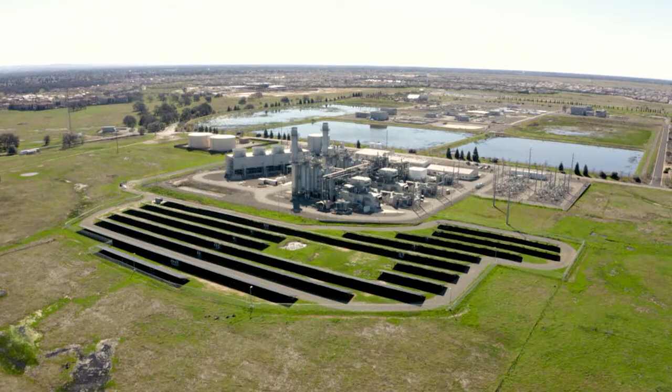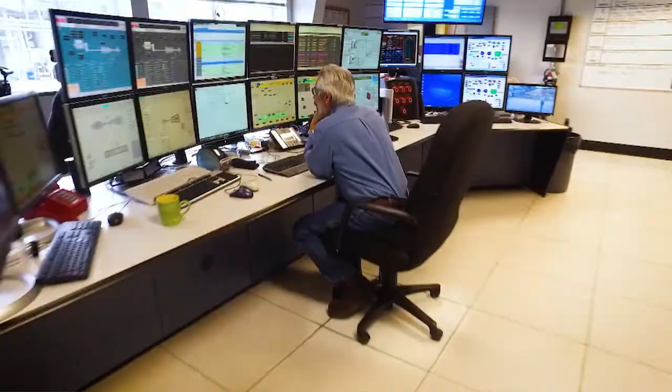Welcome. Good evening. On behalf of the commissioners and staff, I would like to welcome you to the November 22nd, 2022 City of Roseville Public Utilities Commission meeting. This 7-member commission is responsible for studying and advising the City Council regarding all utilities owned or operated by the city, including electric, water, wastewater, and waste services.

The Public Utilities Commission advises the City Council regarding planning, rates, public information, cable television franchises, and other matters relating to such enterprises, and may also hear citizen complaints as to operational rates. The Public Utilities Commission also advises the City Council regarding the activities of such joint powers agency as the city may be a member of, or which relate to such utility enterprises.

At this time, I would like to ask that everyone put their electronic devices on silent. Pam, could you please call the roll? Sure. Commissioner Bilski? Here. Commissioner DeLacy? Here. Commissioner DeMarkey? Here. Commissioner Granger? Here. Commissioner Maish? Here. Commissioner Webb? Here. And Chair Knox, I believe, is absent. Okay. Would you lead us in the Pledge of Allegiance?

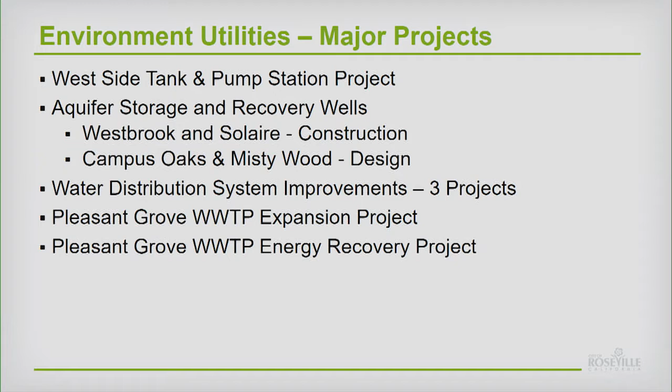We did an expedited construction schedule to get the tanks and the pump station operational so that if we needed it to mitigate supplies during the summer, we would have it. Right now, we're wrapping up the final punch list of the project, and we're going to close it out completely by the end of the month.

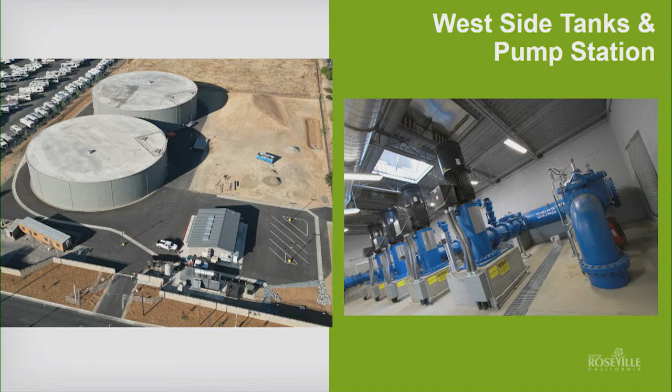This is an overview of what the two 6 million gallon tanks look like now. It's quite different from the bare field, I think, when we last presented to you. The pump station in the bottom right has 4 inline vertical turbine pumps with space for a 5th one in the future. The site also has a spot for a future third 6 million gallon tank if we need that for capacity. And then total project, just good news on this project.

We completed the project for under our estimated $28 million budget. Cool. So we were on budget and on time with this project.

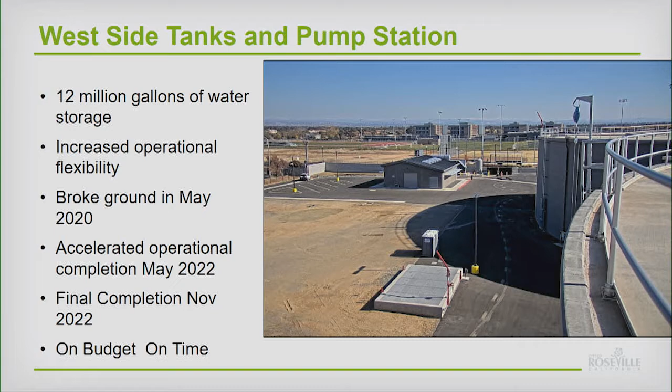One last little thing on the next slide that I wanted to share with you that's going on out at that same site. We are about to break ground on a crew building that will go on that site. It's about a 6,000 square foot building. Roughly half of it is a crew building where our water operations folks can do trainings. There'll be some office space, a conference room. And then the other half of the building is a shop where we can do maintenance and repairs.

There is also an area where our water distribution folks can store materials, pipe, valves, bedding materials, so that when they're working out on the west side of town, they don't have to come all the way back to the corp yard. This project's cost estimate is about $3.3 million. We are ready to break ground any day and hope to do that next week, actually. And a schedule for completion in July of '23.

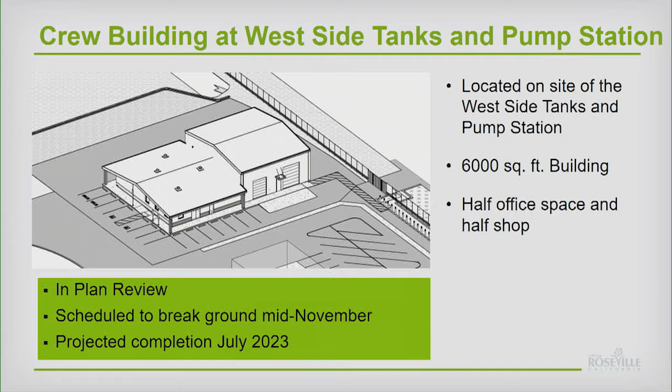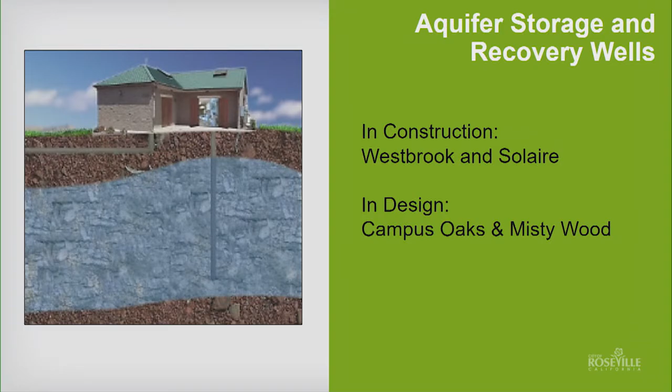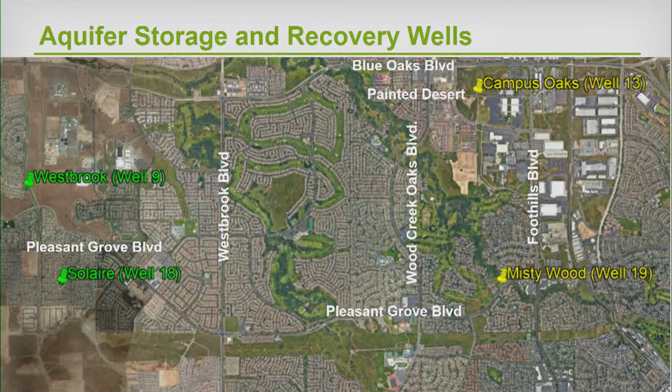At wells 9 and 18, construction is moving right along. We have had some significant delays in the completion of this project, mostly due to electrical components and supply chain issues for those electrical components. So right now, the sites are paved, the well pumps are going down the hole, and the column pipe is going down the hole.

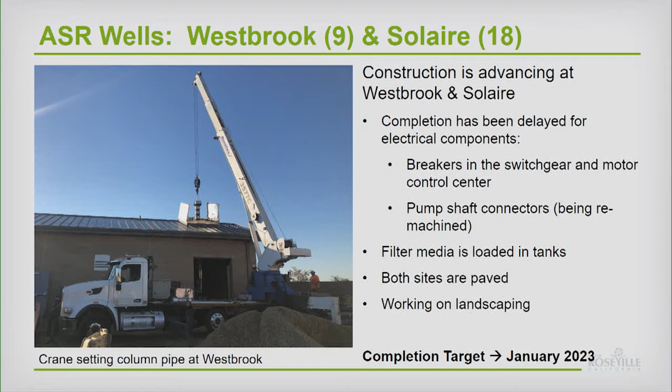What's different about these 2 sites from any of our other ASR wells is they have water filtration on site. We use green sand and activated carbon for the treatment of manganese and iron. There are no contaminants of concern, but they are taste and odor issues that we want to make sure we address before we put the water into our distribution system. The target date, breakers arriving on time, is still in January of 2023.

This is just a quick picture to show you how tight these well sites are. On the left, these are both at Westbrook, is just our scaffolding when we were building the actual building. And on the right, this is actually what the 6-bowl downhole pump looks like as they're starting to set it down the hole.

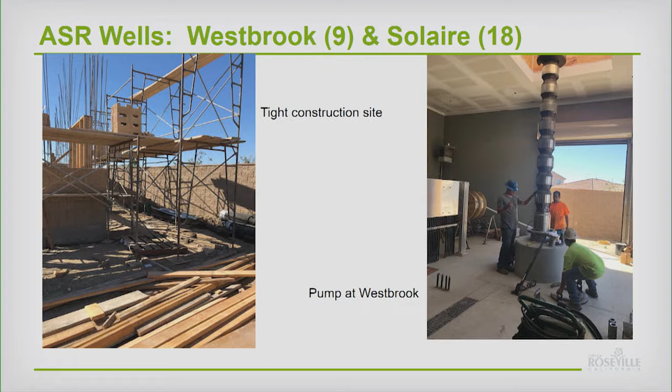At Misty Wood and Campus Oaks, we've done an initial layout of how the facilities will fit on the site. We had to do that. We're going to do this project in kind of phases. We do our initial layout, decide where we want the wells, put out a request for bids for drilling of the wells, and that's about ready to go out. Should be coming to your city council meeting here shortly.

We drill the wells, then there's a couple of months that we take to test the water, pump the capacity of the wells, and finish our final design of the above-ground facilities. We anticipate that the wells will be drilled in the spring. We'll have that summer period of '23 to do our sampling and analysis, finish the final design, and put the construction contract out for spring of 2024.

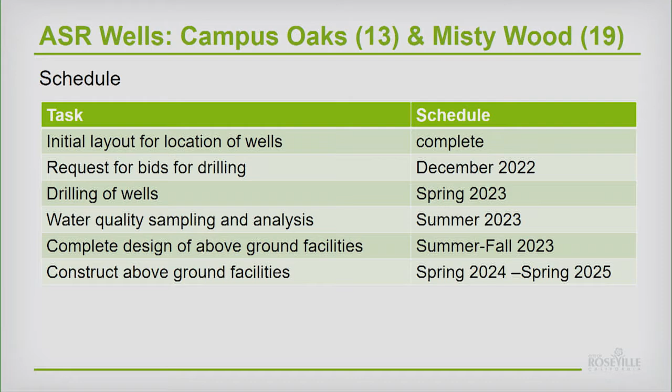This is where the Misty Wood well site is going to be. That's on Pleasant Grove. As you know, or may not know, we are planning on widening Pleasant Grove in that area to a 6-lane road. So this initial design is what we're kind of settled on right now.

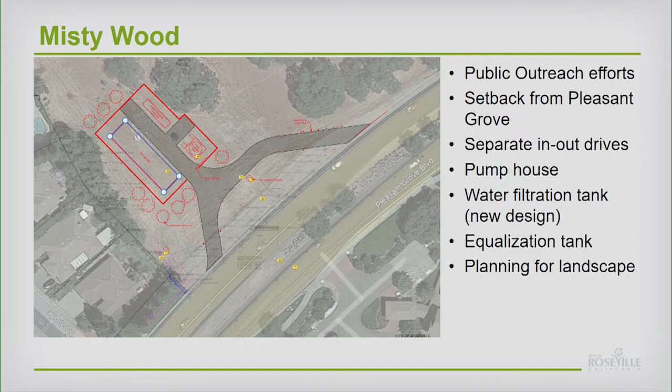It has a separate entrance and exit from the facility so that workers can get safely in and out of the site. It also gave us the opportunity to push it back from the street. We've been working with landscapers and doing public outreach early so that we make sure that we have residents' buy-in and can maintain their nice scenery from those few houses right there.

The next slide shows the Campus Oaks, which is actually, I don't know if you guys know where Painted Desert is. This site is west of Roseville Parkway and south of Blue Oaks. There's just some development out there right now.

We have been working with the developer who is at the moment getting ready to put his utilities in Painted Desert Drive. He's been very cooperative and helpful with us so that when they stub up the utilities, the water, the sewer, the electric onto this site, they're in line where we already need them and we won't have to do any changes when we get ready to build.

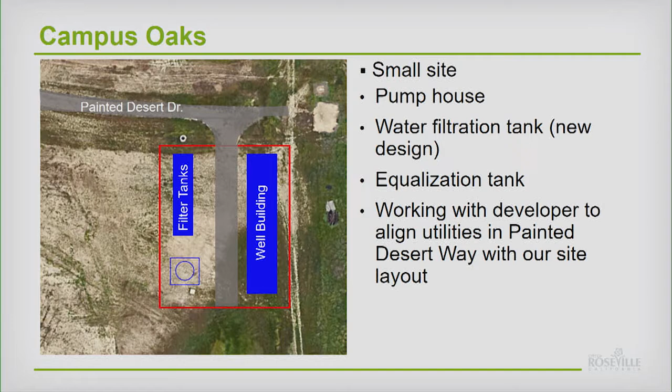The last project I'd like to tell you about is what we're calling the 3 Projects project. They are improvements to our water distribution system. Back in 2020, when Caltrans and Placer County Transportation Planning Agency were finalizing their plans to widen auxiliary lanes on Interstate 80, it was identified that there were 3 places where the city has water lines crossing the freeway that could be in conflict with the I-80 project. Those I've highlighted in yellow.

I don't know if you can see them, but maybe on your screens you can see them in yellow. Those are places where we have older, smaller water distribution lines that actually were there before the freeway was put in. So they were put in to service just the local communities. What we did to make sure that we would have no issue if we actually lost those pipelines due to failure or to abandonment, or it was just too costly to replace them under the freeway.

We modeled the system and looked for ways that we could connect loops and build redundancy so that we wouldn't lose fire flow and flow capacity if we did lose those. So we identified 3 places. On the top left, there's a circle on Douglas Boulevard. Our water main in Douglas does not actually connect across that bridge between Royer Park and Saugstad Park. So that's the first place we're going to target.

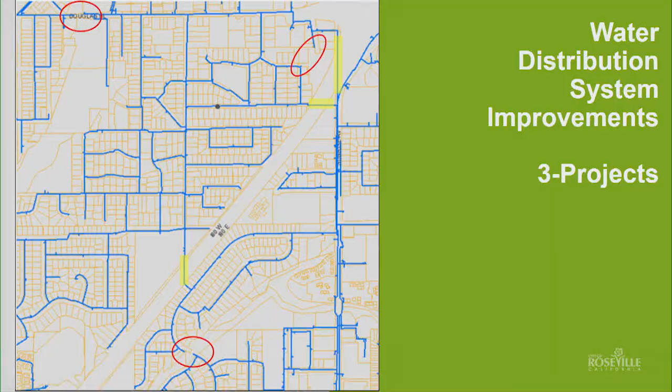The second one on the top right is a connection we're going to make between South Harding Boulevard and Wayne Drive. And then the bottom, there is a creek crossing that does not exist. It looks like at some point it was designed to carry our water system across, but it was never constructed. On the next slide, I'm going to tell you about the projects again. We are currently in design on all 3 of these sites. If you'll move to the next slide for me.

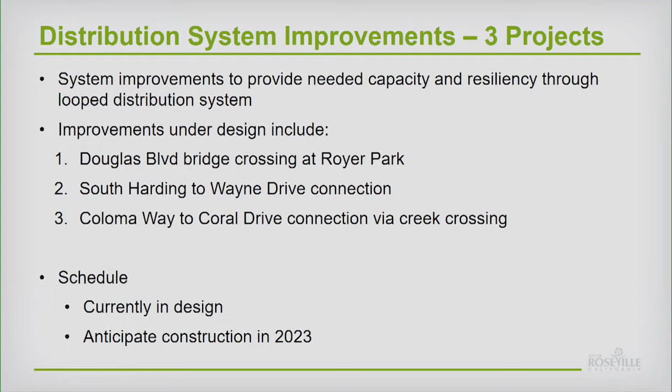This is what Douglas looks like. We're going to connect to both sides of the bridge, the existing water lines. They're already 8-inch on both sides of the bridge. And we will hang a new water main under the bridge on the south side of the bridge. So it's very little excavation to complete that loop.

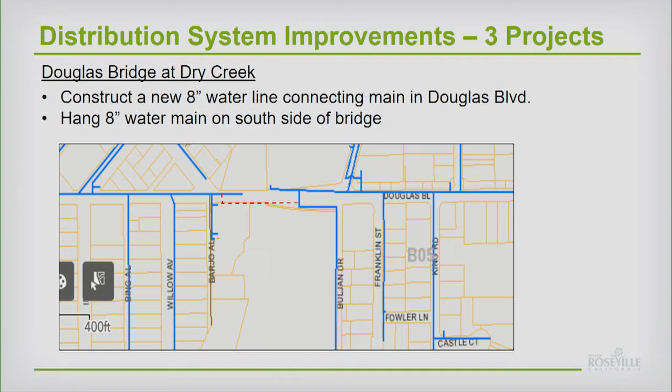On the next slide, I show where we're going to do the connection between Wayne Drive and South Harding. When we did the downtown water mains replacement project in the Hillcrest area last year and year before, we planned ahead for this, and we had a blind flange and T put on there at the corner of Marion and Wayne Drive in anticipation of this connection. For this part of the 3 projects, we are going to need an easement, so we are working on that with the homeowner.

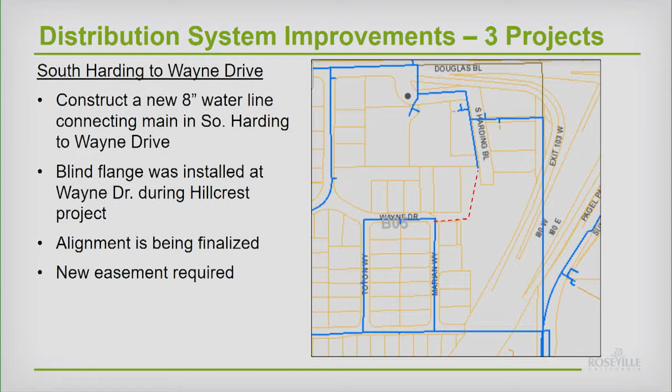And then the last one on the next slide is the creek crossing. We're going to construct a new connection between Coloma Way and Coral Drive. On one side of the creek, it is a 6-inch pipe, and on the other side, it's an 8-inch pipe. But we will take a new 8-inch line under the creek by bore and jack to connect these and loop our systems. On this particular section, we're working on the environmental and permitting. So all of these 3 projects are designed to build some resilience, redundancy in our system in case we lose those other lines.

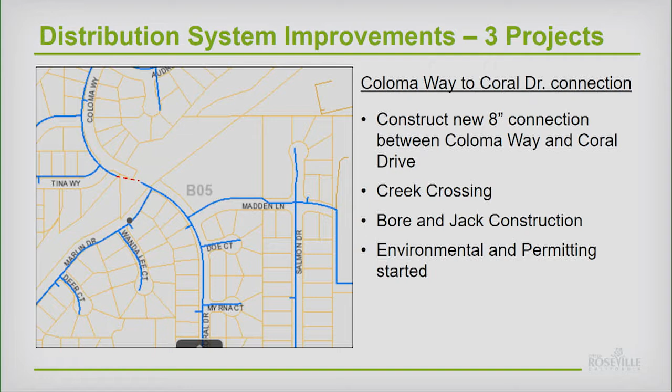So I am done talking about water systems, and I'll turn it over to Tracy, who can tell you about the wastewater project she's working on. All right. So, good evening. I'm here to talk about the Pleasant Grove wastewater treatment plant expansion and energy recovery projects. These projects have been on the books for a very long time, but I am excited to tell you that this might be the last time you have to hear about them.

The goal of this project was to expand our capacity from 9.5 million gallons to 12 million gallons. So taking out additional solids is what we really need, in the biological oxygen demand. So the primary clarifiers were needed and put in. That allowed us to then put in digesters to process those solids and then eventually dream up the energy recovery project, which I'll talk about next. This project is really to help also increase our treatment reliability and our operation efficiency.

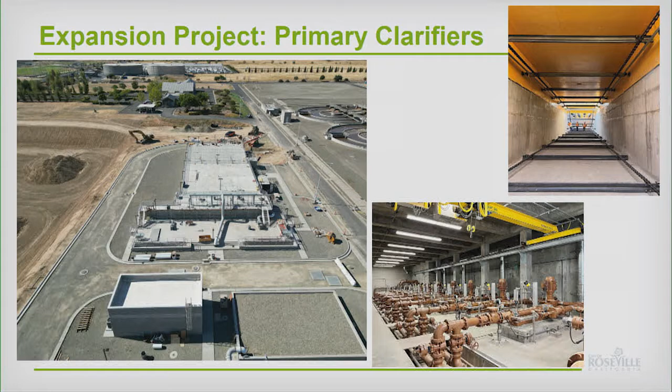And then at the bottom, you can see that's an electrical building, because this facility requires quite a bit of electricity. And then the biofilters, which help to reduce and eliminate the odors caused by this facility. Next slide. As part of this project, the startup is the most difficult part of this project, at least for our operators, maybe not for the contractor, but also the scariest part for us.

And that was, how do we tie in these facilities to this already operating treatment plant that flows 9.5 million gallons a day? How do we do that? So in order to tie in the primary clarifiers, we had to bypass all the flow out of our existing 54-inch pipe so that we could make 2 connections into it. It required the contractor to install 1,000 feet of 18-inch temporary HDPE pipe.

And through a lot of teamwork, we were able to figure out how to use the city's existing pumps to pump water through that pipe and into the oxidation ditches, and be comfortable enough to allow that to happen for a period that we really weren't sure how long. First, the contractor said they needed 2 days. They ended up needing more than a week. But our operators were very happy with this bypass, with the exception of a little bit more smell than we're used to, and felt very comfortable moving forward with this. Next slide.

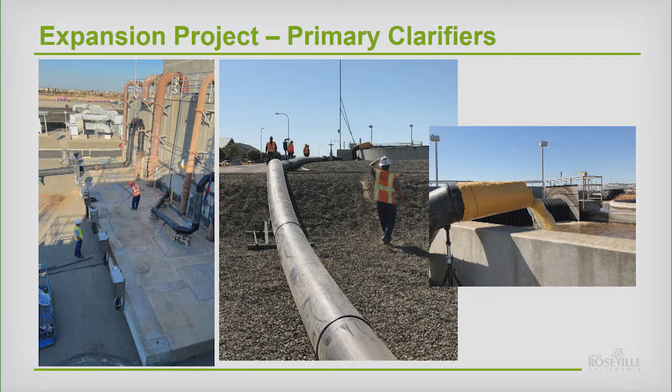So the bypass allowed us to cut into our existing 54-inch pipe in 2 locations and install these very large elbows to allow flow to go into the primary clarifier and then come back out of the primary clarifier. So we abandoned the area in between these 2 elbows. You can see them, they had to use a crane to lower the elbows in. Those holes are 16 and 21 feet deep.

It took them 2 days to cut that concrete pipe in 2 locations, and 3 days to connect up those pipes. Then we were able to put water in. We took the bypass off, and we put water into them and flowed them, and we have now operated the primary clarifier for over 28 days and have had really good results and are very excited.

We have over 50% biological oxygen demand removal, which is why the treatment plant was designed for 12 MGD, but because of the high solids loading, we were never able to get to that full capacity. So these primary clarifiers are doing exactly what we want at a very high efficiency. So 50% of that BOD removal is a high percentage, which we're very happy with. And then 70 to 80% of the solids, the TSS, is being removed. And so overall, we're very excited about the function of these. And these are being operated by our operation personnel now.

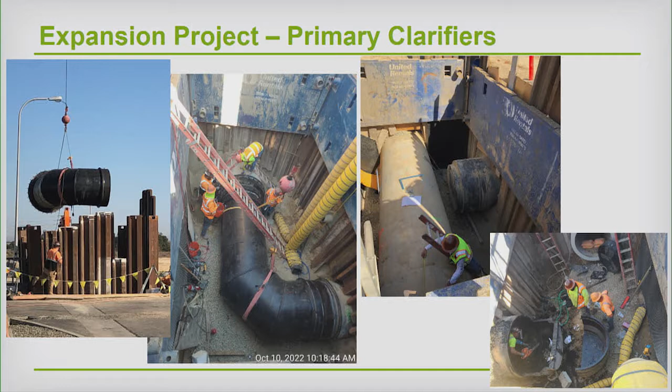The next area that we're slowly starting up is the digester area. So this consists of the 2 digesters with the building in between. The building in between controls the flow into and out of the digesters, and between the digesters, and also includes 2 boilers that help to heat the digesters. The digesters are like your stomach and need to be at 98 degrees to function properly. So that's the digester area. We're starting to start that up, and I'll explain a little bit about that.

Also in the back of that, on the top left, you can see the solids handling building, and then between that building and the tank is the ferric chloride. Those will slowly be started up, but haven't been started up yet. It's a very stepwise startup process, which is why we won't be done until July. Most of the construction is complete. It's just the process startup takes a long time.

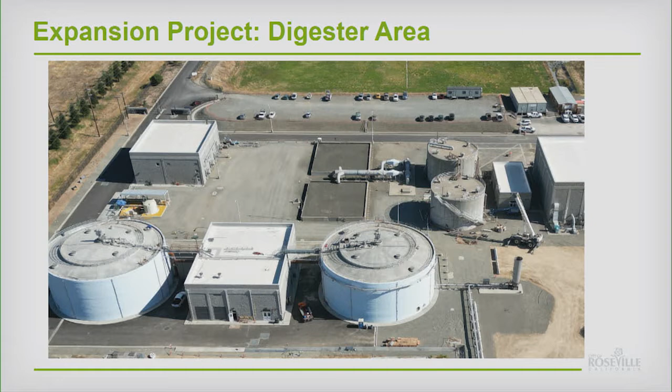So to start up the digesters, first we had to fill the tanks up with water to about 10 feet from the top. And then because they're anaerobic, we had to pump in nitrogen gas. It took us 2 weeks to pump in nitrogen gas to replace the oxygen to be less than 8%. It was not only the top of the tanks, but all the pipes that connect to it. We just can't have oxygen or it won't be anaerobic and we can have an explosion. So we spent a lot of time. We were very meticulous about it.

You can see the truck there with the nitrogen tanks. It slowly pumped in there. We got to 2% oxygen, which was great. Made us feel really good. After we got done with that, then we trucked 248,000 gallons of sludge from Dry Creek digester area.

We have a sludge holding tank. So basically we have extra sludge and then we process it and then we ship it out. So we took the extra sludge right after it came out of the digesters, filled these trucks, and for 4 days had 3 trucks going back and forth between the treatment plants to start up and insert into digester 1. That work is now done.

And this week, we are very excited that we are starting to slowly pump sludge from the primary clarifier over to the digester. Monday, we did 1,000 gallons. Today, we did 2,000 gallons. We'll continue to slowly implement the live sludge into the digester because starting up a digester is a very finicky process and you don't want to upset the bugs, so we don't want to just slam a whole bunch of primary sludge in there. So experts are telling us that it will take probably about 41 days to start up our digesters if we don't have any upsets.

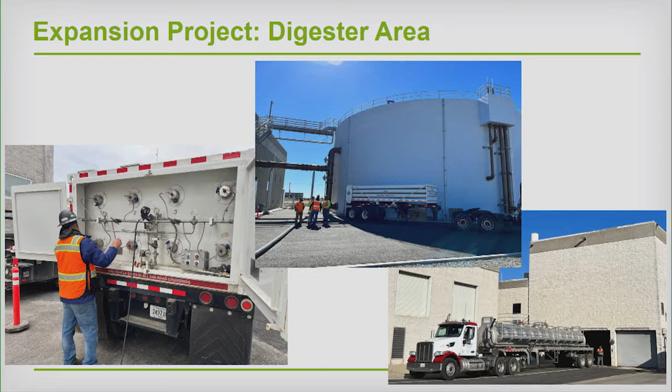So the operators have a schedule. The lab is doing testing every day. We're analyzing it and looking closely. We have a 7:30 meeting every morning to talk about what we're doing that day. But we're very excited and fingers crossed that we've really had a great startup process. We've not run into a lot of problems, and we're hoping that that's the case, because when you run into problems, then you run into supply chain issues to fix those problems, and we don't want to deal with that anymore. So we're hoping. So the next project I want to talk about is the energy recovery project.

We started with that being an early construction item because we knew we wanted to do upgrades to our Corp Yard gas station, which is the only other CNG station we have. And so getting this started up allowed us to actually just recently, this week, almost complete the upgrades to the Corp Yard. So having 2 stations has been really nice. And so that was an early construction startup for this site.

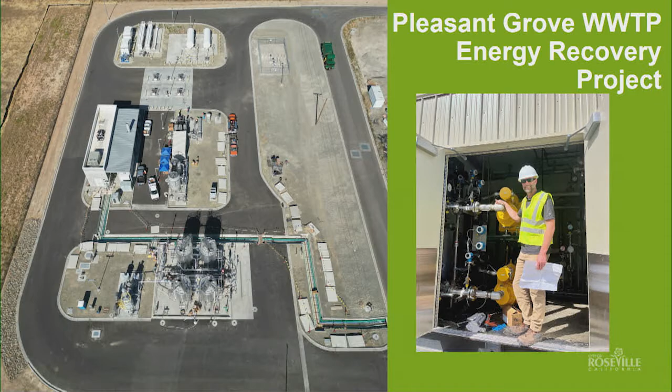The really awesome thing about these projects is that they work hand in hand to produce renewable assets. So the digester produces a gas that the gas separation system at the Energy Recovery Project can turn into fuel for our solid waste trucks. High-strength waste can be brought into the Energy Recovery Project using fats, oils, and grease trucked in from other sources, and it's like candy to our digesters. So it produces more gas, which allows us to fuel more trucks. So we get to take away a waste and turn it into something beneficial from the fats, oils, and grease.

The tail gas from the gas separation system allows us to power microturbines. The microturbines, we're estimating they're going to produce about 10% of our power usage at the Pleasant Grove wastewater treatment plant, which is a lot of power. And then the other really cool thing about the microturbines is that they produce hot water. And that hot water will be sent back to the digesters to help keep them at that 98 degrees.

We've been running the digesters without this whole system working. We've been running them about half a month, and we're spending about $13,000 a month just to heat those digesters. So that hot water coming back is a great benefit. It's a small thing that we don't really talk about that much, but it is a big financial benefit.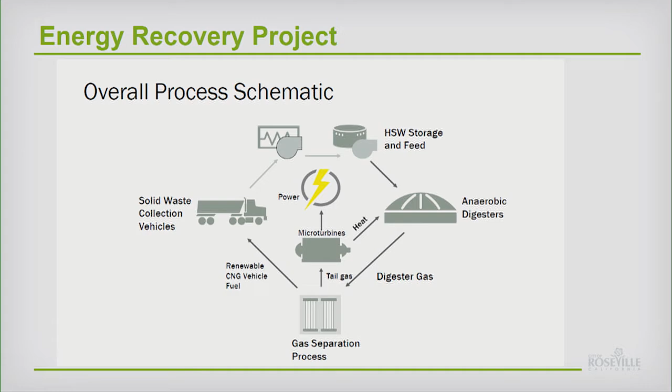So it's been just a great asset, this additional project onto the project that we needed, which was the expansion project. The Energy Recovery Project just provides our ratepayers a great benefit, and it's very environmentally friendly, and the state loves it too. So that's all I have. Do any of the commissioners have questions for staff at this time?

Yeah, I do. It's an incredible presentation. You all just did a marvelous job. I'm really impressed. On the digester gas that you're going to use for solid waste trucks, have you done that before? Is this all new, or have you tried that with any of your existing vehicles? No, we don't currently have that capability here at the city. It's new. Our CNG trucks only run right now on natural gas from PG&E.

So this is a technology that is proven, though. Our engineers have done it before, so that's good. Modifications to the engine? They don't have to be modified at all. Really? So the same trucks that are filling with natural gas right now will pull up and fuel with the same.

We basically modify it to be the same. That's good. That's interesting. Really, really clever. It's a proprietary system that does that, though. And this will be operational on those trucks? We should be fueling those trucks with that gas by April, May. Impressive. And the nice thing about that is we get credits for filling the trucks with digester gas. So we make money on that too. Absolutely. Interesting. Will you be able to sell the gas as well?

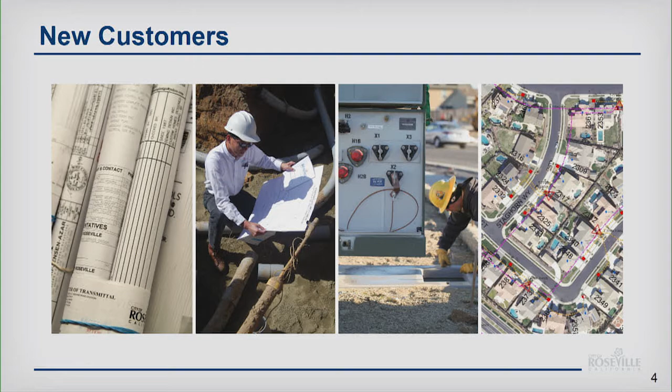So we had a lot of lots that were buildable in the city already, over 1,000 lots before this crisis started. So developers are able to continue to build on those lots without any impacts to their business. And moving forward, given that we're still having trouble getting transformers in, instead of building out the entire subdivision, for new construction we will only place a transformer where a home is being built.

So one developer building models and production homes is only going to take up 2 transformers versus maybe 10 or 12. So that helps keep it fair for everybody, to keep everybody moving forward, so the first person in doesn't get 12 and then 10 of them sit idle. So we're trying to adjust our construction practices to make sure that we maximize the supply that we do have.

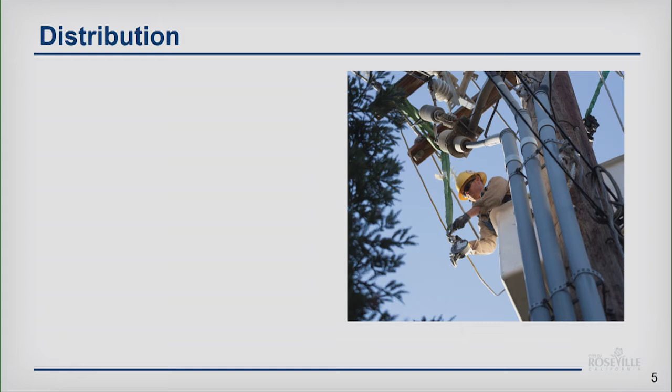Next slide. In addition to our new customer work, we have a lot of projects that we're doing on our distribution system. Key projects this year are the replacement of our industrial 12 kV switchgear number 1 at our industrial substation. The switchgear is at end of life, and it serves about 1,400 customers, so it's key to keep that type of equipment operational to limit our outage times in customer accounts.

Also, we're going to be doing some 60 kV bus protection upgrades at multiple substations. This is just adding some additional protection equipment that allows us to more safely and reliably protect our system and clear faults faster to limit damage on our components.

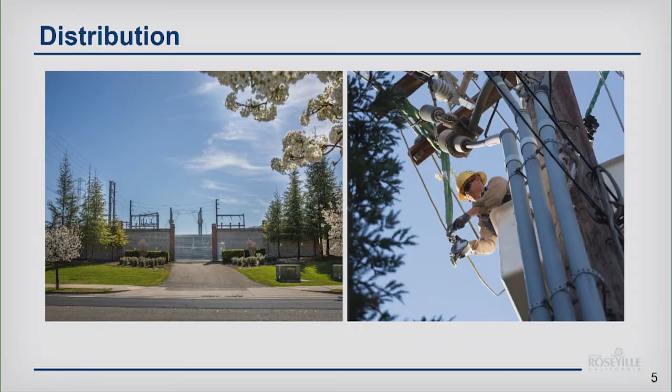And we're in the process. We've already started parts of it, but we're reconductoring one of our 60 kV lines from our Berry Street substation to Douglas substation. Once that's complete, that'll drastically improve our ability to provide backup to what's mostly the east side of town. We have a loop on the east side of town that is fed from Douglas and Berry Street, but there's very few lines that can tie those two together. So this is diversifying there and adding a larger capacity line to help our situation in contingency situations when we have a loss of a piece of equipment.

So we're also doing a lot of work at our power plant. We're doing controls upgrades and replacement on our duct burners. The duct burners are responsible for about 25% of the output of the plant, so it's important that we replace the controls for that equipment as it starts to reach end of life, which it's doing right now. We're also replacing controls on the zero liquid discharge system. Those are also end of life, and they also happen to be kind of a standalone product right now.

The replacement product will incorporate into the main control system at the power plant to help keep everything consistent out there. And basically what the ZLD, zero liquid discharge system, is used for is to provide clean water for our steam turbine generator. We're also replacing a lab sample panel that is part of the same system. It does online monitoring of that water to make sure that we're providing proper water chemistry to the steam turbine generator.

And we're also going to be installing an enclosure around our steam turbine generator in this coming year. That'll help better protect it during inclement weather conditions. So, that's all I have for the distribution system. I'll pick it up again with facilities and other.